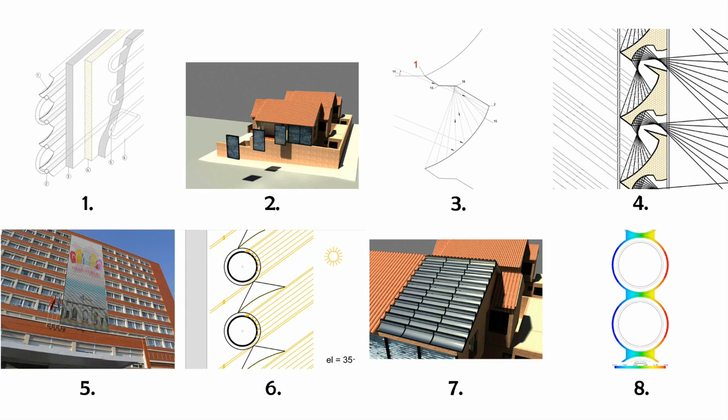In the whole group of videos we want to present you the main patent in detail, and also the descriptions about some products and several aspects related with this technology, whose aim is to illuminate with sunlight a house or a building or absorb that energy according to the thermal demand curve, and without mobile elements.

It means that the system absorbs much more energy in winter than in summer, and that is necessary to be able to dimension a solar heating system which in winter needs 8 times more energy than domestic hot water, that ACS curve, and nothing in summer.

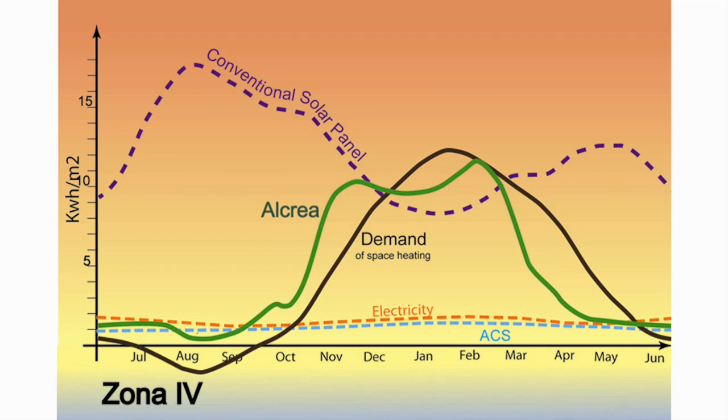In addition, that technology allows generating pictures or colors on the building's facade, without mobile elements. This image or colors could change with the sun or spectator position. As well, the system is able to generate high concentrations. To understand the system, it is recommended to start by the videos of summary and basics.

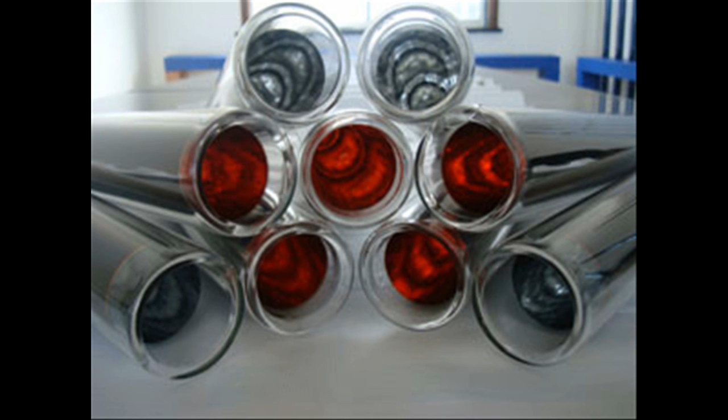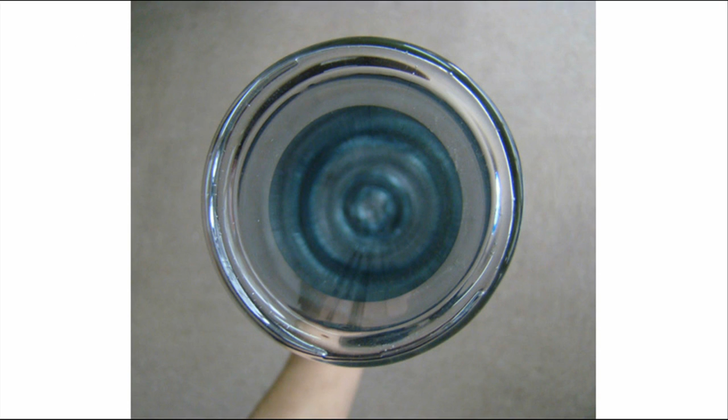Apart from the main patent, there is another one that complements it. It is relative to solutions using vacuum tubes and gathers new products based on them. In a short way, a vacuum tube is composed of 2 concentric glass tubes. In the space between both of them, the vacuum is found.

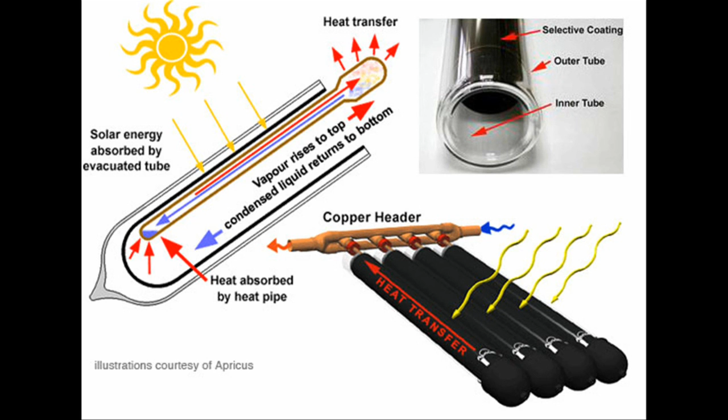Therefore, the heat transmission from the internal tube towards the exterior one is very low. Generally, the vacuum tubes are used to collect the solar energy that reaches the absorbent coating of the internal tube. The absorbed heat is transferred to a heat pipe which is located inside the tube. This may also be done to a U-pipe in the U-pipe system.

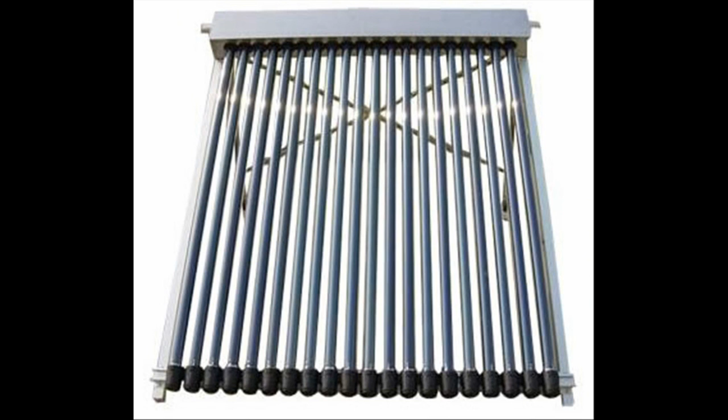Tubes are placed in a way that they form panels. These panels gather the collected heat through each tube and through its pipes. The focus of this patent is completely different. It uses vacuum tubes with enclosing functions, while partially sacrificing its efficiency as a collector.

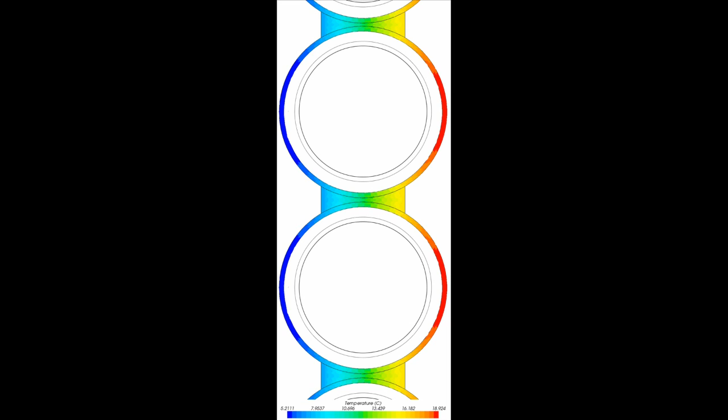Basically, the patent claims to build an enclosure wall with vacuum tubes, which is possible by touching each tube with the next one. The gasket has to guarantee the correct insulation between the internal side of the tubes and the outside. If the gasket is made with an insulating material and the design is appropriate, the thermal conductivity of the wall could be around 1 watt per square meter Kelvin, that is similar to the thermal conductivity of other conventional walls.

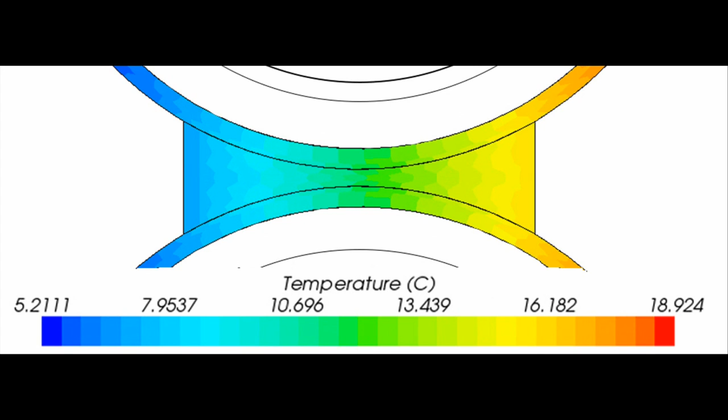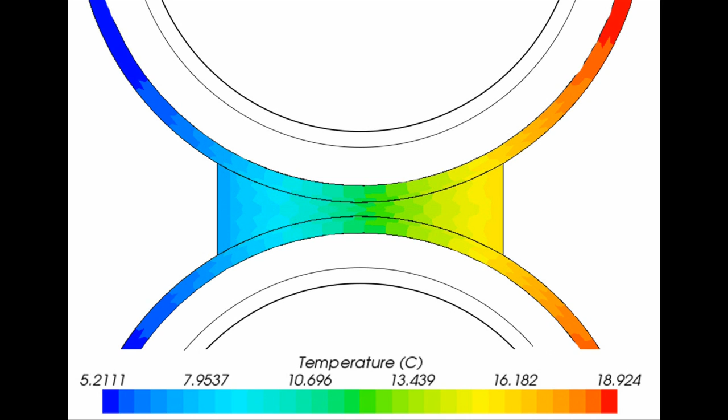The heat transmission between the outside face and the inside face of the wall is mainly done through the external tube walls. That means that it is due to the linear conductivity of the external tube wall. It is shown in this picture, which has been calculated by finite elements. These results improve with a bigger diameter of tubes, and the thermal conductivity of this enclosure could reach values of 0.8 watts per square meter Kelvin.

If the tubes are transparent, it would allow the passage of most of the light, but with a slightly distorted image, which provides privacy between the inside and the outside of the wall. If the gasket surfaces are reflective, these effects are accentuated.

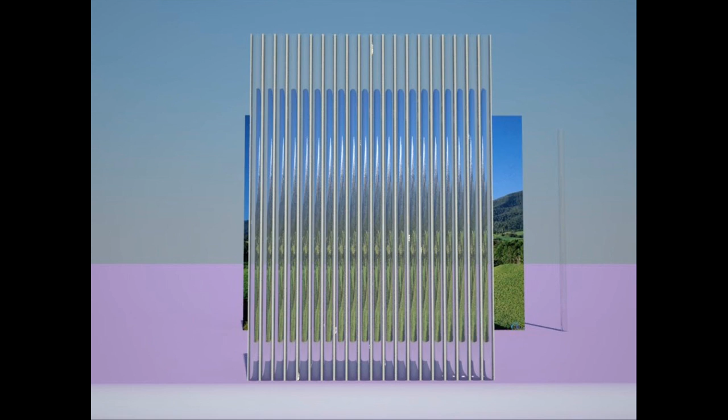On the other hand, the main patent claims a technology to harvest solar energy in accordance with the seasonal thermal demand curve of the house or building, and without moving parts. The geometry is optimized as well as all the design parameters for the whole. These form small linear concentrators and their absorbing area, both of which are fixed.

For that optimization, the absorbing area receives much more energy in winter than in summer. This is according with each season of the year, and for each given geographical location. During the largest part of the day in summer, the sun is high. When this happens, the concentrator reflects the incident light into the sky. This contributes to refresh the building, the environment, and the planet.

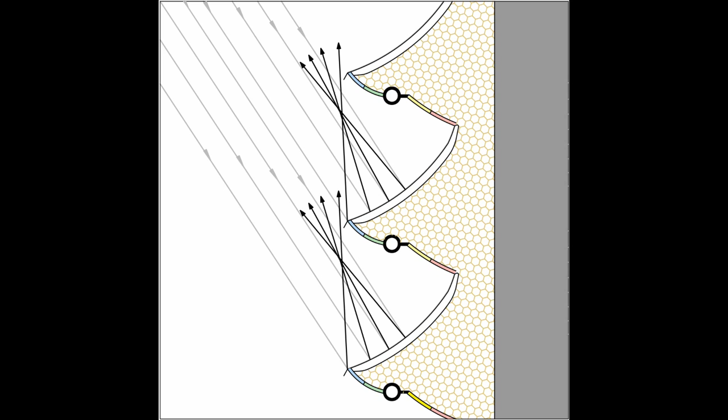In spring, autumn, and partially in summer, the sun is not so high. In this case, the incident light reaches the zone that is close to the absorbing area, but the incident light does not touch the absorbing area. Due to this, the system does not collect much energy at this time.

When the solar height is typical of winter, the concentrated radiation falls on the collection area most of the time. Therefore, this area collects a lot of energy over the course of the day. At first hours in the morning, the reflected radiation reaches the nearest zones to the absorbing area that is located at the internal side, but the radiation does not reach directly the absorbing area. Because of this, the energy is barely collected.

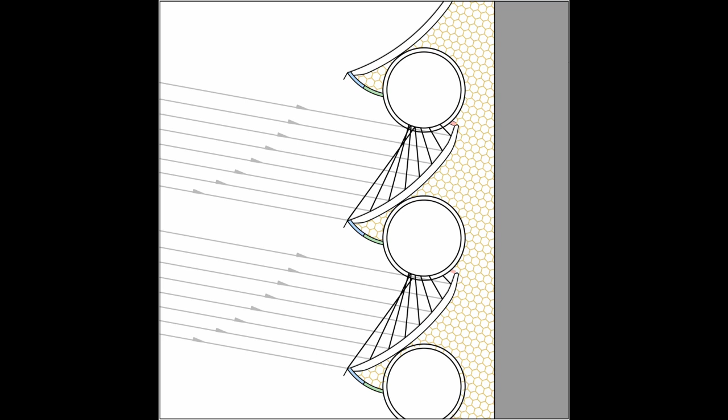That is less certain if the captation area is a vacuum tube, because they have a very low heat loss coefficient, and the vacuum tube could be placed at the black, yellow or pink zone if it's necessary. The optimization for each locality or wall orientation determines how large the absorbing area has to be, within standardized values, to collect in accordance with the seasonal thermal demand curve.

If the design is according to the patent, then the harvest energy is similar to the demand energy for each season of the year. This solves the above problems of sizing the heating system regarding hot water.

Even if the vacuum tubes were conventional, with an absorbent coating on the surface of the inner tube, this configuration of panel with adjacent tubes separated by gaskets, that we name vacuum tube wall, still keeps the hermetic and insulation properties between the inside and the outside of the vacuum tube's wall. Even a certain amount of sunlight passes through this vacuum tube wall.

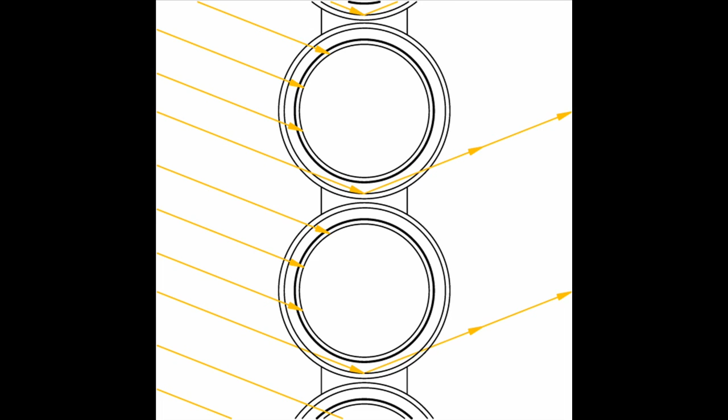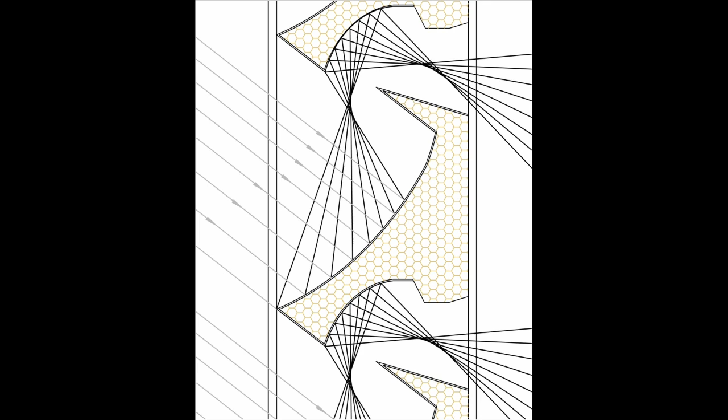Normally, the radiation reflected at the concentrator is used to heat the absorbing area. However, the main patent contemplates another possibility. This alternative is allowing the light to pass through the harvesting area, so that it reaches a reflective surface, which is optimized in order to redirect the light towards the internal side of the panel. That solution is also applicable to vacuum tubes, improving insulation properties and keeping the hermetic properties.

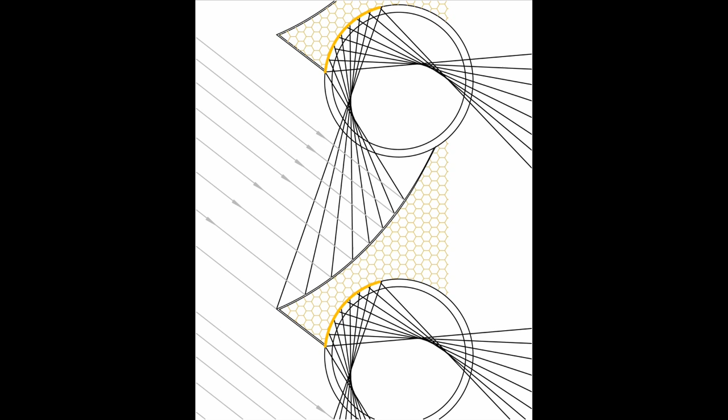That configuration could be simplified even more building the vacuum tube wall, where the vacuum tubes are separated from their adjacent tubes by a gasket which already incorporates a reflexive surface, that is the concentrator, and another one which is a concave reflexive surface. The gasket number 5 includes the concentrator reflexive zones, number 6, and the concave reflexive surface number 2.

This reflexive surface could be placed into the internal tube, line number 1. But this solution is more expensive. On the other hand, the gasket could adopt other equivalent forms, such as the number 4, but a concave reflexive surface should be created at the external tube, line number 3, which is also more expensive.

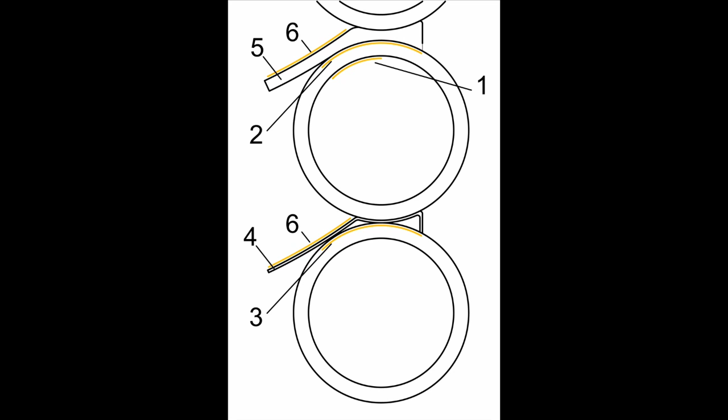When the sun is low, a part of the sunlight directly goes through the tubes, and the other part is reflected at the concentrator number 6. Then the reflected sunlight reaches the concave reflective surface number 2, entering in this way at the internal side of the vacuum tube's wall. If the surface and the geometry are alike as described at the main patent, the amount of sunlight that comes into the tube at the different seasons will have a form such as the thermal demand curve. An important part of the radiation is absorbed by the vacuum tubes during their multiple crossings through them.

But in the patent, several forms are also included to extract part of this absorbed energy. Moreover, on several geographic zones, such as the north of Europe and high latitudes, it is more important letting the sunlight pass into the building than collecting energy. And this vacuum tube wall allows maximizing the sunlight that goes in during the winter, in relation to that which goes in during the summer. That keeps really low the thermal conductivity, which can reach values as 0.8 watts per square meter Kelvin or less, depending on the gasket length.

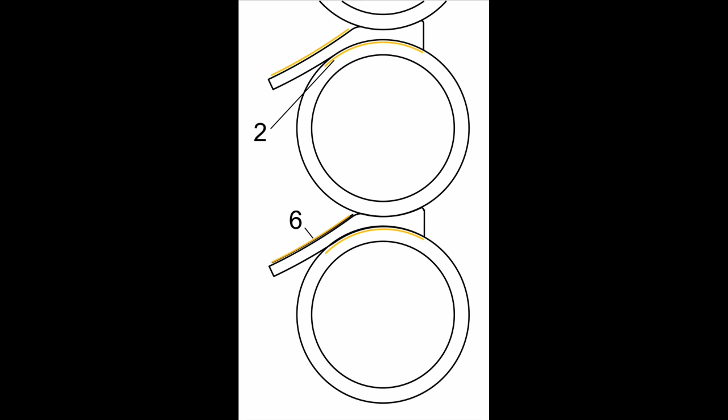In addition, this wall can have a front glass and a rear one. In this way, it gets an absolute cleanliness and an increase of the structural resistance, and the thermal conductivity can achieve values around 0.5 watts per square meter Kelvin. The cost of a configuration like the previous would mainly depend on the producer country, but it can be lower than 60 euros per square meter, even lower than some kind of traditional walls, with the advantage that they allow 40–50% of sunlight to pass in winter.

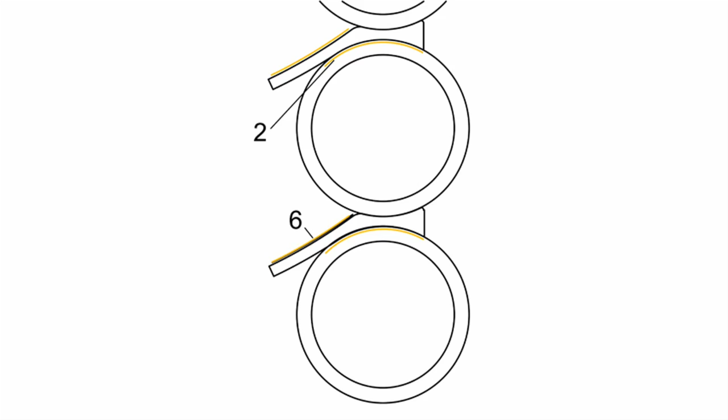With a simple gasket that does not incorporate the concentrator and the concave reflective area, which is very appropriate for north orientation, the cost could be reduced more than 15%. The frame's design allows changing the tubes individually in case of break, and also blowing the internal tube to recover the part of energy absorbed by the tubes.

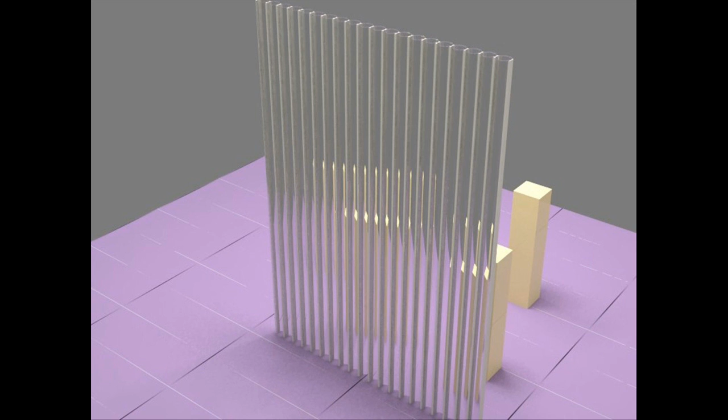Conceptually, the frame is formed by two guides or profiles, where the tube ends shift, and they keep the tubes and the gaskets joined, even when the gaskets are not adhesive. If these guides or profiles are not straight and flat, the surface formed by the tubes will not be either. It could be, for example, a circular ledge window, or the handrail or the enclosure of a spiral staircase, if the guide follows its form.

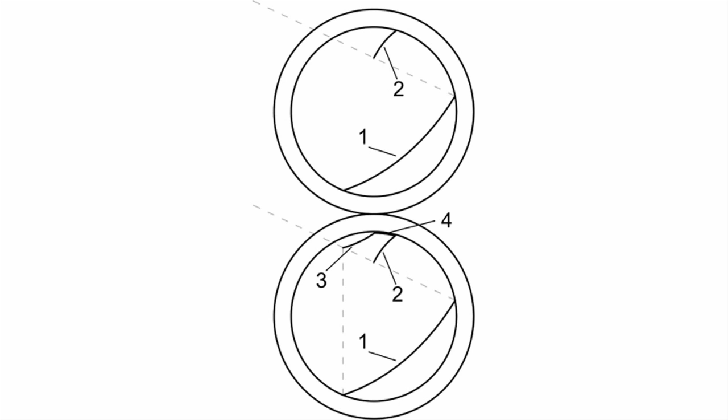Most of the designs or configurations of the patent technology are improvable using vacuum tubes. This encompasses all or part of the set of concentration and absorbing surface, and in addition, they stay adjacent and with intermediate gaskets doing the enclosure and insulation functions. The patent gathers a lot of different designs, as for example introducing rotatory vertical slats inside the vacuum tube's wall.

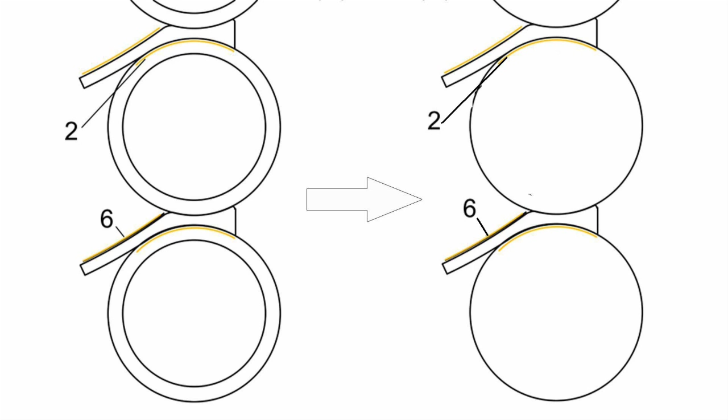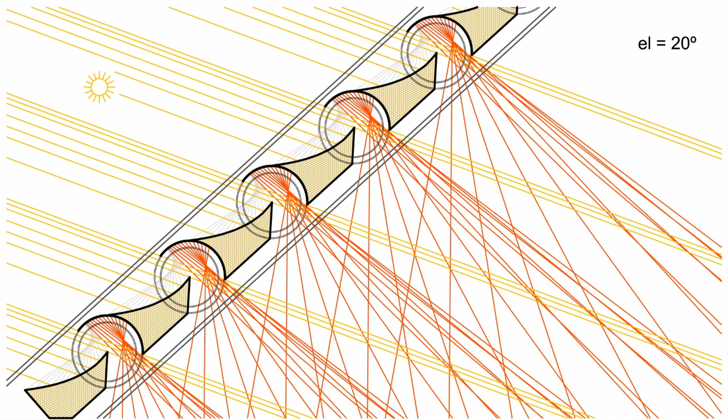Moreover, in the configurations where harvesting energy from inner tubes is not intended, the need for this inner tube is avoided and it can be a single tube. This decreases the cost of vacuum tubes by almost half and generally improves the results. For example, if the vacuum tube is composed of the outer tube and it's placed between two glasses, the thermal conductivity is the same, around 0.5 watts per square meter Kelvin, and the transparency, image sharpness, and performance in the pass of light and energy are higher. And something similar may be the use of vacuum tubes to create high thermal insulation skylights.

Video 9 and the next ones show the prototypes and explain how to get benefit from the project. Those benefits could be gotten at individual level or for a company, as well as economic, social and environmental benefits.